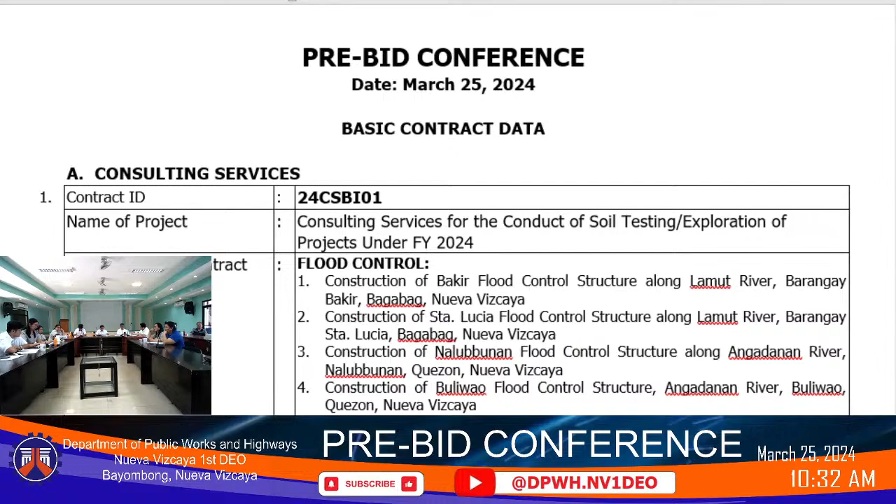Allow me to present to you the contract ID 24CSBI01, with the project name Consulting Services for the Conduct of Soil Testing Exploration of Projects under FY 2024, with an approved budget for the contract of 2,640,000 pesos. Duration is 105 calendar days. Cost of bid documents is 5,000 pesos. Source of fund: FY 2024.

So here are the locations of the contract, for the flood control projects. First one is the construction of Bakir flood control structure along Lamut River, Barangay Bakir, Bagabag, Nueva Vizcaya, with a number of 1 borehole at 15 meters depth. Next is construction of Santa Lucia flood control structure along Barangay Santa Lucia, Bagabag, Nueva Vizcaya, with a number of 1 borehole at 15 meters depth.

Next is the construction of Nalubbunan flood control structure along Angadanan River, Nalubbunan, Quezon, Nueva Vizcaya, with a number of one borehole. Next one is the construction of Buliwao flood control structure, Angadanan River, Buliwao, Quezon, Nueva Vizcaya, with the number of one borehole at 15 meters depth.

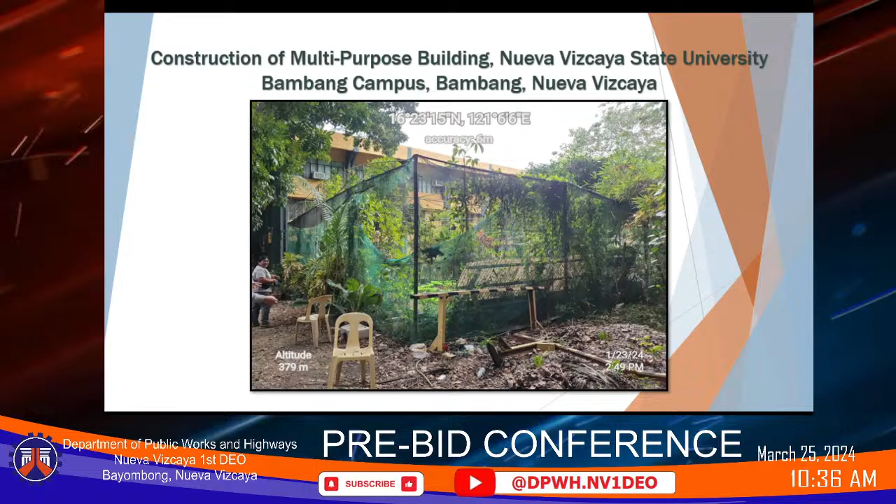Next is the construction of multi-purpose building and other improvements within the Capitol compound beside the Nueva Vizcaya Convention Center in Bayombong, Nueva Vizcaya with a number of 3 boreholes at 15 meters depth. Next is the construction of multi-purpose facility Nueva Vizcaya State University Sports Complex at Bayombong, Nueva Vizcaya with a number of 3 boreholes at 15 meters depth.

Next is the construction of DPWH Nueva Vizcaya First DEO Office Building Bayombong, Nueva Vizcaya with a number of 3 boreholes at 15 meters depth.

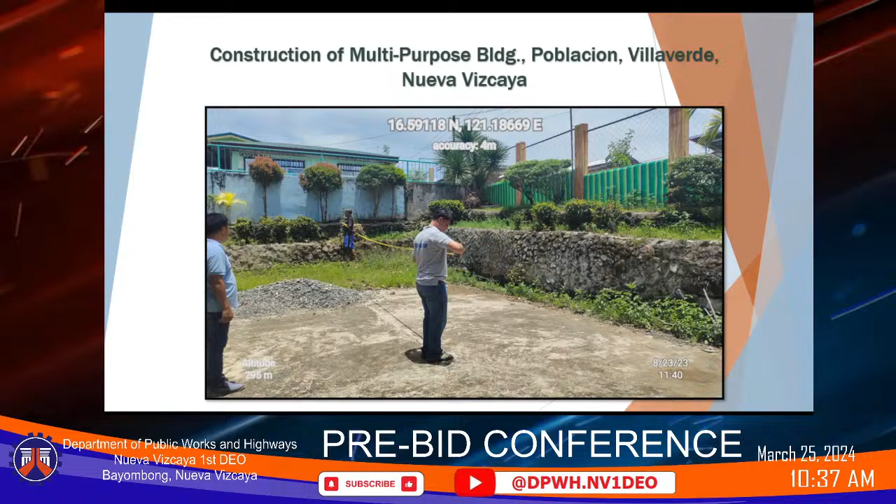Construction of multi-purpose building Balete, Diadi, Nueva Vizcaya with 2 boreholes at 15 meters depth. Construction of multi-purpose building Poblacion, Villaverde, Nueva Vizcaya with 2 boreholes at 15 meters depth. Construction of multi-purpose building Duli, Ambaguio, Nueva Vizcaya with 2 boreholes at 15 meters depth. And the construction of multi-purpose building Solano, Nueva Vizcaya with a number of 3 boreholes at 15 meters depth.

So for the bridge project, we have Collocal Bridge B01245LZ along the Maharlika Bypass Road with a number of 2 boreholes at 20 meters depth.

Next slide, please. So the scope of consulting services, the consultant shall conduct the following: geological survey and investigation, geotechnical investigation, at proposed project sites.

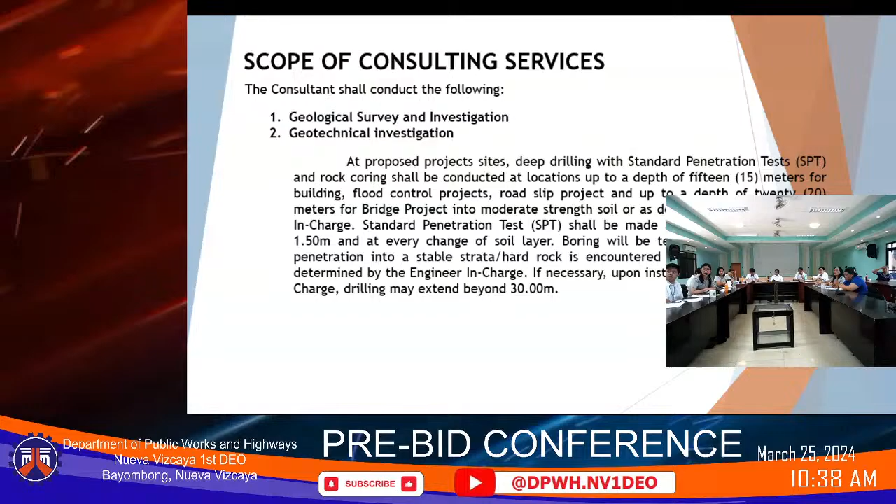Deep drilling with standard penetration tests, SPT, and rock coring shall be conducted at locations up to a depth of 15 meters for building, flood control projects, road slip projects, and up to a depth of 20 meters for bridge project into moderate strength soil or as determined by the engineer in charge.

Standard penetration tests shall be made at a minimum interval of 1.5 meters and at every change of soil layer. Boring will be terminated when 3 meters of penetration into a stable strata or hard rock is encountered at shallower depth or as determined by the engineer in charge.

If necessary, upon instruction of the engineer in charge, drilling may extend beyond 30 meters.

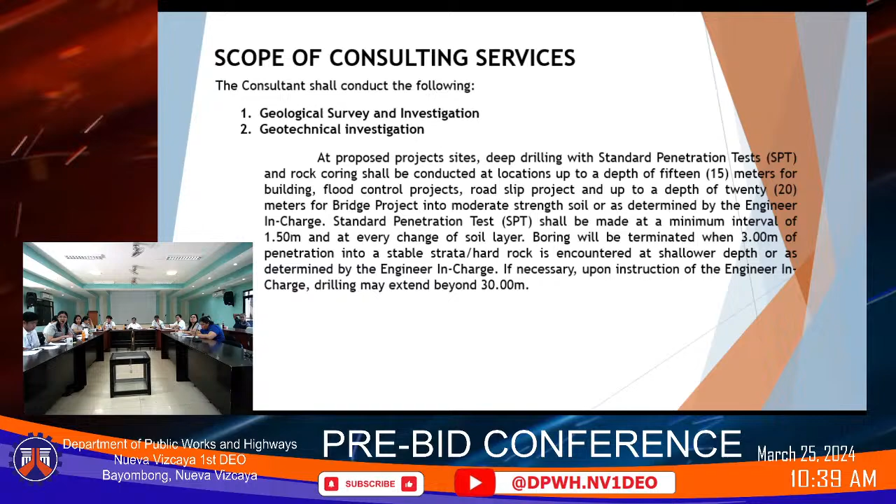Next slide, please. So, for the outputs, first one is the inception report, monthly progress report, partial report on investigation results, and final reports.

Next slide, please. So here are the final report shall include but not limited to the following. First is the field geological and geotechnical investigation and methodology, borehole drilling and coring, laboratory testing, vicinity maps, final boring logs, final laboratory test results, borehole location plan in a scale of 1:250, soil profile along structures showing boring, drilling, coring methods.

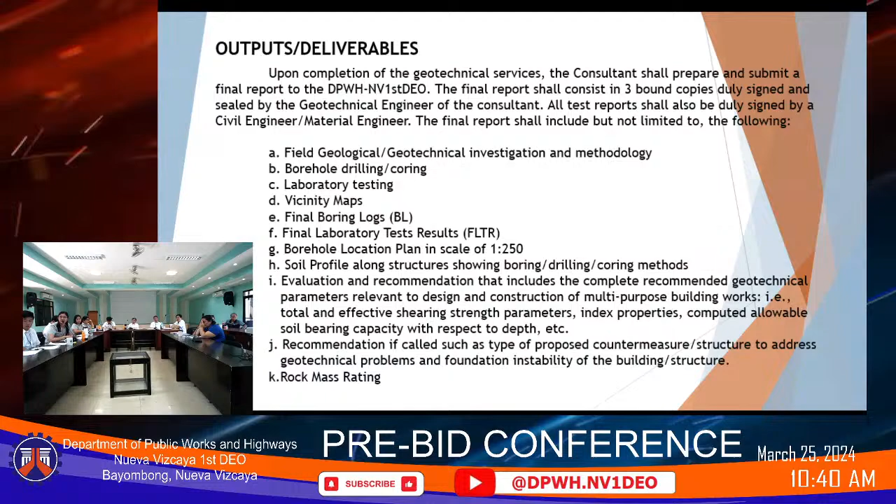Evaluation and recommendation that includes the complete recommended geotechnical parameters relevant to the design and construction of multipurpose building. The recommendation, if called such, as type of proposed countermeasure or structures to address geotechnical problems and foundation instability of the building and structure. Next is the rock mass rating.

Next slide, please. So other data to be submitted is the boring logs.

Next slide, please. Photographs. And that would be all. Thank you.

Thank you, Engineer De La Cruz, for the brief explanation of the terms of reference for these consulting services. From the Secretariat, does anyone from our YouTube live viewers, especially our prospective bidders, have any question or clarification regarding the first contract with contract ID number 24 CSBI 01? None.

Let's go to our BAC members. Starting with the Planning and Design section, provisional member Engineer Jermaine Buenavista, do you have any amendment for these consulting services? No amendment, Mr. Chair. Our provisional member for consultancy, Engineer Risa Tuliao? No amendment, sir. Noted. Our provisional member for all types of procurement, Architect Ivy Salazar? I have no amendment, sir. Noted.

Our BAC vice chair, Engineer Danilo Bernabe? No amendments, Mr. Chair. Since the majority of the BAC members have no amendment for these consulting services, we'll adopt the basic contract data as advertised. Take note, Engineer Brian Nilabs.

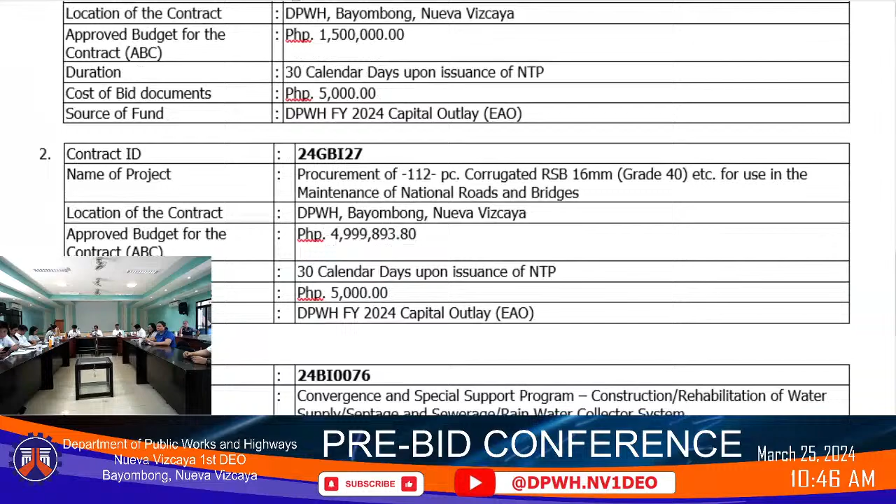For contract ID number 24 GBI 27, the name of the project is procurement of 112 pieces corrugated RSB 16mm grade 40, etc., for use in the maintenance of national roads and bridges. The location for the contract is at DPWH Bayombong, Nueva Vizcaya, and the approved budget for the contract is 4,999,893 pesos and 80 centavos.

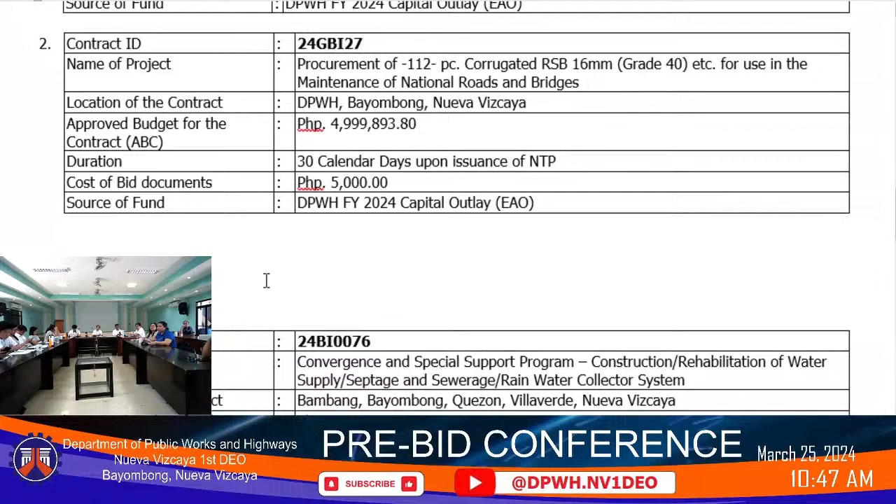The duration is 30 calendar days upon the issuance of NTP. The cost of bidding documents is 5,000 pesos and the source of fund is from the DPWH FY 2024 capital outlay. So for this goods contract, the contents are 310 bags of blown asphalt and 26 pieces of single-arm 8-meter pole solar LED roadway lighting.

The lighting is 120 watts, 1.5 meters mast arm length, with 250 km/h wind speed resistance on the mast arm. The other specifications for the solar panel: it should be 36 volts, 120 watts.

Monocrystalline silicon solar panel with a lithium ion grade A battery, 35 Ah/24V, battery model 32650, rated at 2,900 cycles. The LED chips are industrial grade high lumen chips. The charge controller should be microcomputer intelligent control for circuit protection.

The power output is 120 watts, luminous flux is 21,600 lumens, charging time is 6 to 7 hours, lighting time is 10 to 12 hours per day, and it can sustain up to 8 to 12 rainy days.

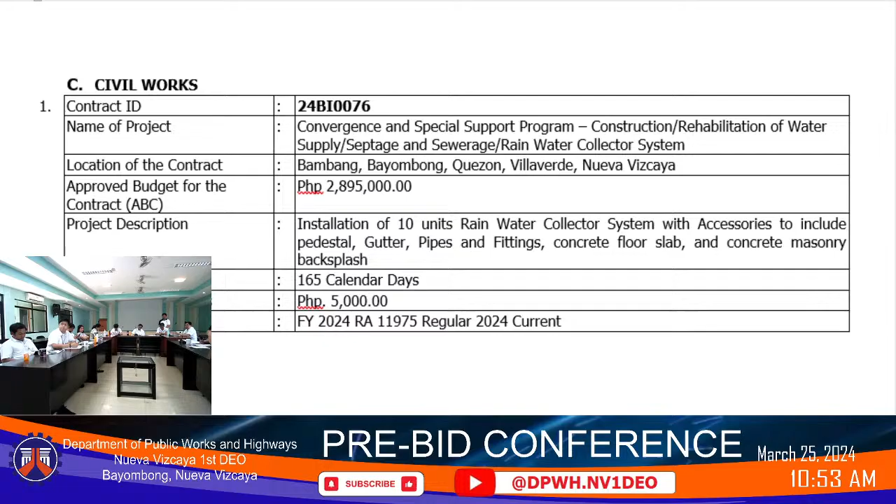The rainwater collector system 2024 shall be installed within 10 public schools. We have Nagbitin Elementary School, Villaverde, Governor Juan Manzano Elementary School, Villaverde, Almaguer South Elementary School, Bambang, Darubba Elementary School, Quezon, Masok Elementary School, Bayombong, Bintawan Norte Elementary School, Villaverde, Manamtam Elementary School, Bambang, Kasat Elementary School, Bayombong, Ocapon Elementary School, Villaverde, and Sawmill Elementary School, Villaverde.

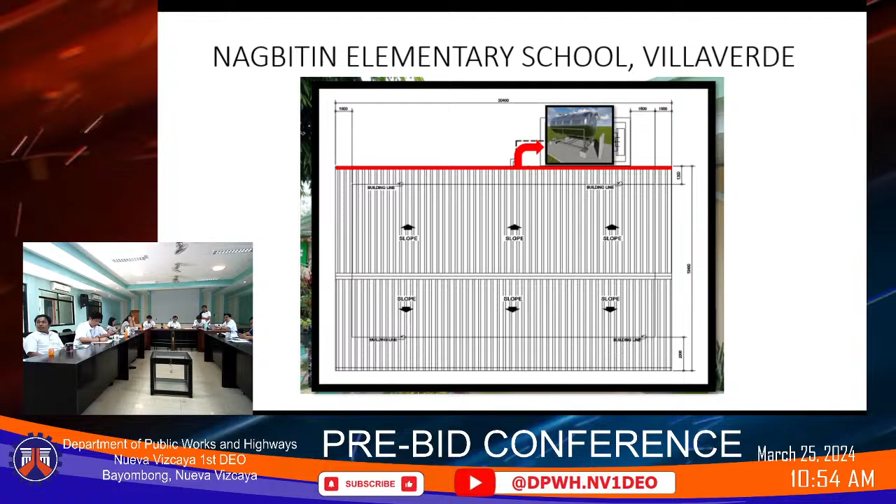The scope of work for this school is removal of existing downspout, installation of wire mesh and gutter, installation of pipelining, construction of one unit rainwater collector system. Source of aggregates is Maddiangat Quarry, and the source of material is Solano Market.

Next is the Governor Juan Manzano Elementary School with the geotag photo coordinates of 16.604765 degrees north and 121.156956 degrees east. This is the roof plan of our proposed rainwater collector. The location of the rainwater collector will be at the left side of the building.

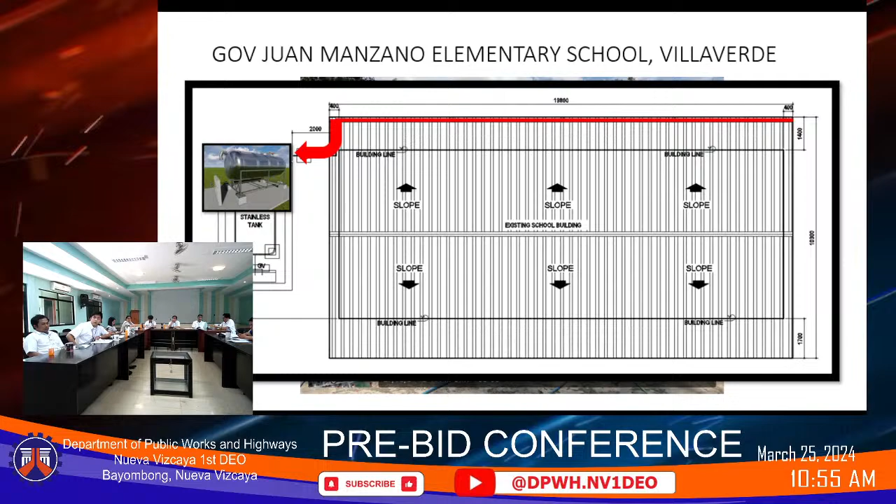The scope of work for this is the removal of the old fascia board, installation of steel fascia board, installation of flashing, installation of gutter with wire mesh, installation of pipelining, construction of one unit rainwater collector. Source of aggregates for this project is Maddiangat Quarry, and our source of material is Solano Market.

For Almaguer South Elementary School, this is the roof plan of our building. The location of our rainwater collector would be at the left side of the building, and the pipelining of the rainwater collector would be at the front and the rear of the building.

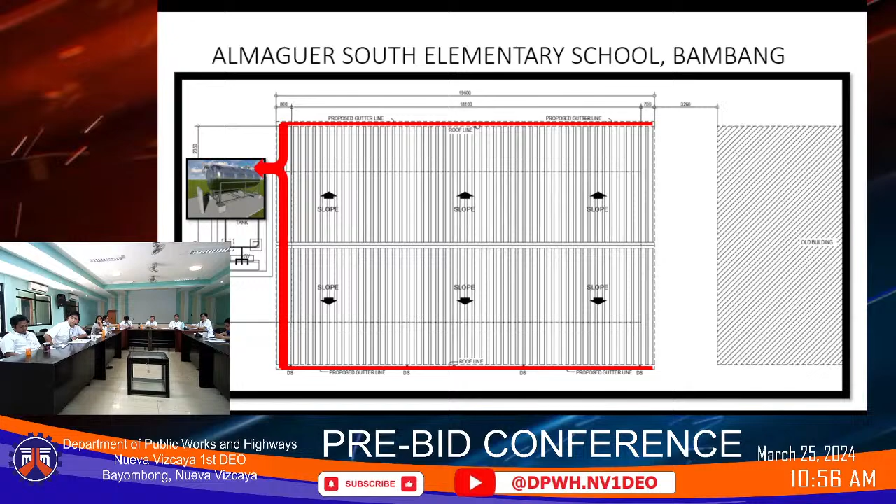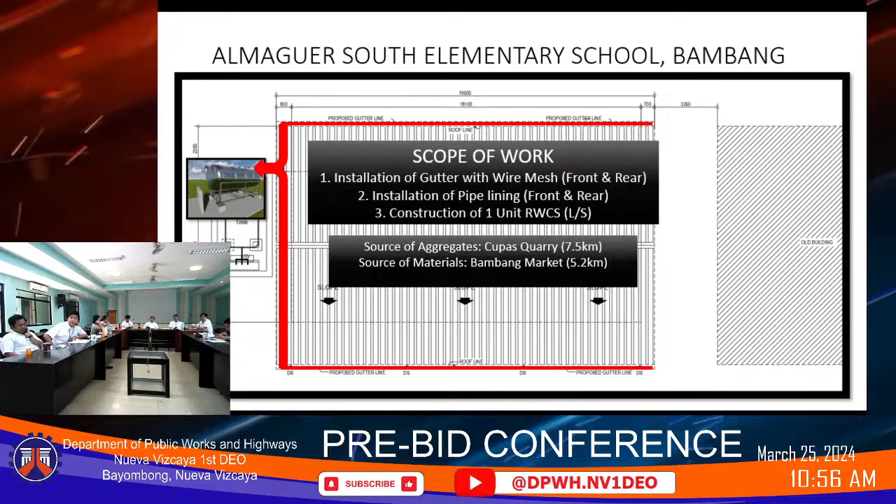The scope of work for this is the installation of gutter with wire mesh, installation of pipelining, and construction of one unit rainwater collector. The source of aggregate is at Cupas Quarry, and the source of material is at Bambang Market. Next is from Darubba Elementary School, Quezon.

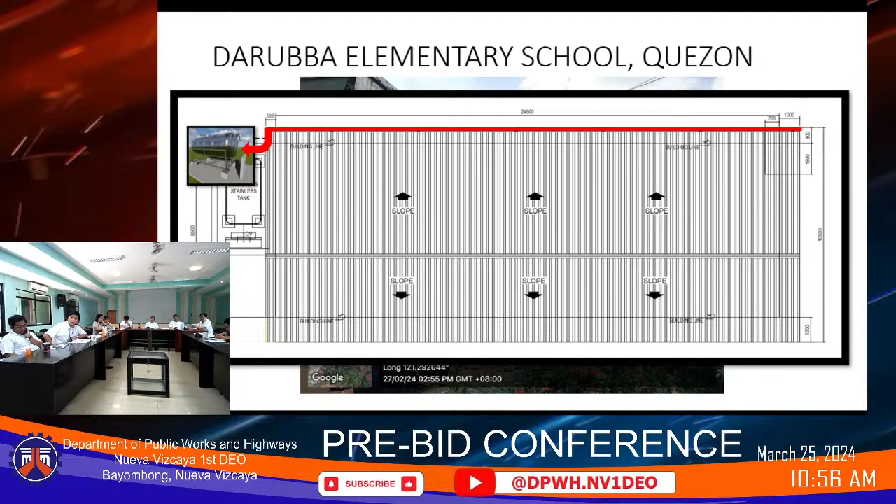This is the roof plan of our proposed rainwater collector. The location would be at the rear side of the building, and it directs to our proposed rainwater collector, which is located at the left side of the building. The scope of work for this school is installation of gutter with wire mesh, installation of pipelining, and construction of one unit rainwater collector. Our source of aggregate is Maddiangat Quarry, and source of material is Solano Market.

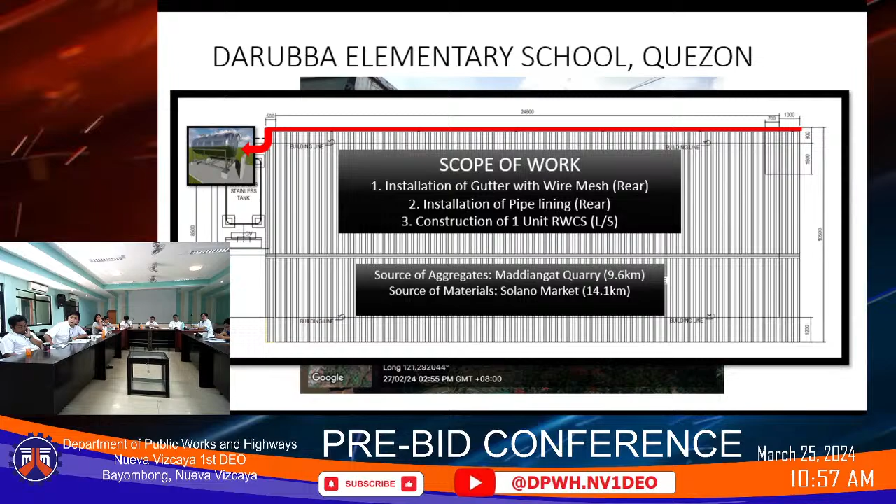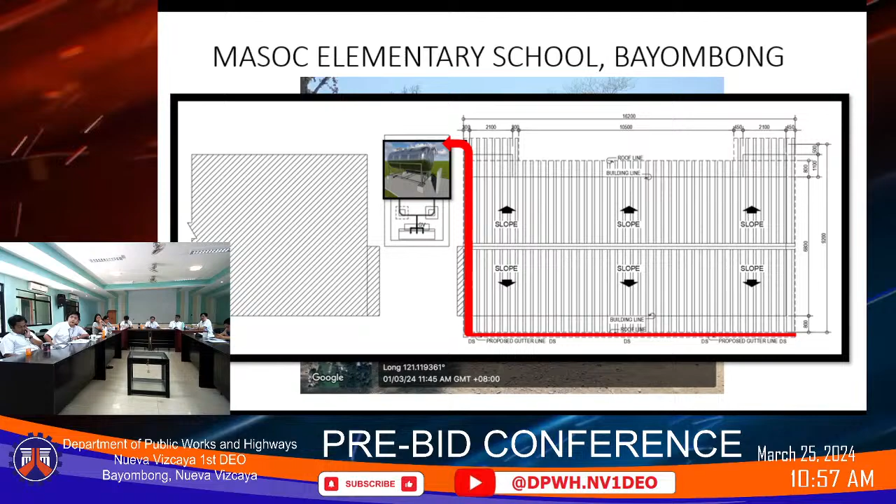For Masoc Elementary School, Bayombong, this is the roof plan of our rainwater collector system. Our rainwater collector would be at the front of the building, and our tank would be located at the left side. The scope of work for this building is removal of old fascia board, installation of steel fascia board, installation of gutter with wire mesh, installation of pipelining, and construction of one unit rainwater collector. The source of aggregate is Vista Alegre Quarry, and the source of material is Bayombong Market.

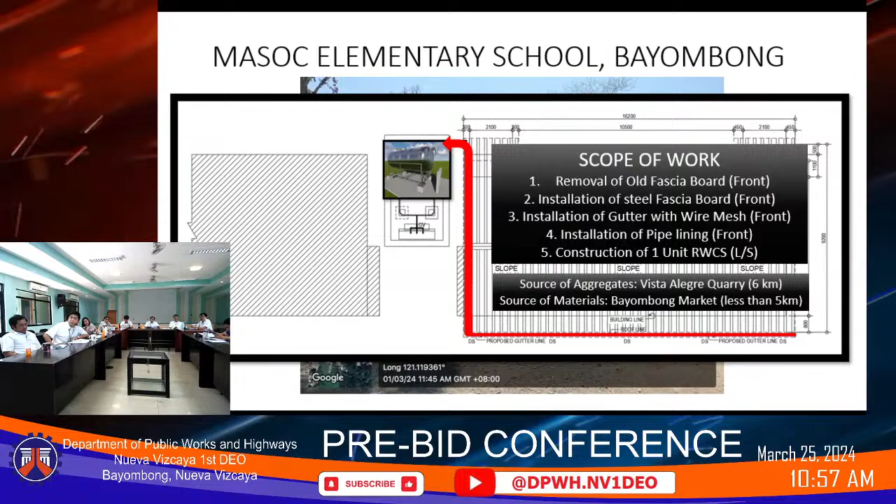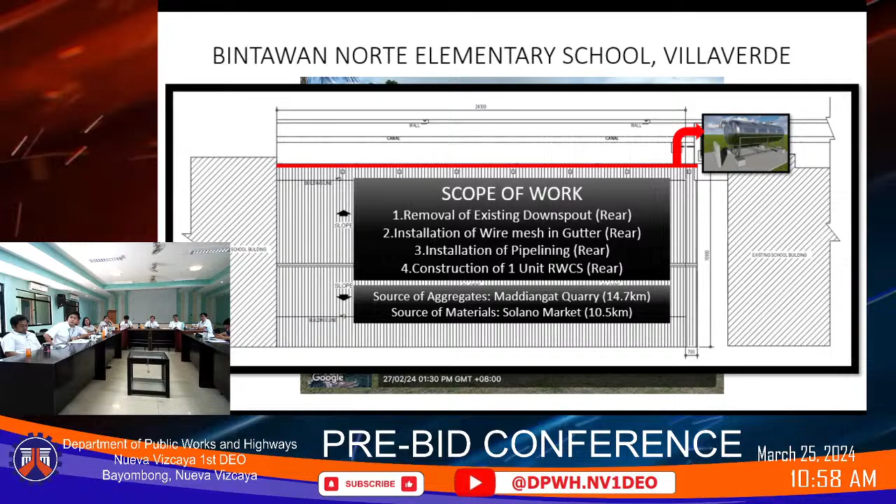Next is Bintawan Norte Elementary School. This is the roof plan of our proposed rainwater collector system. The red line would be our rainwater collector, located at the rear side of our building. The scope of work for this school is removal of existing downspout, installation of wire mesh in gutter, installation of pipelining, construction of one unit rainwater collector. Our source of aggregate is Maddiangat Quarry, and source of material is Solano Market.

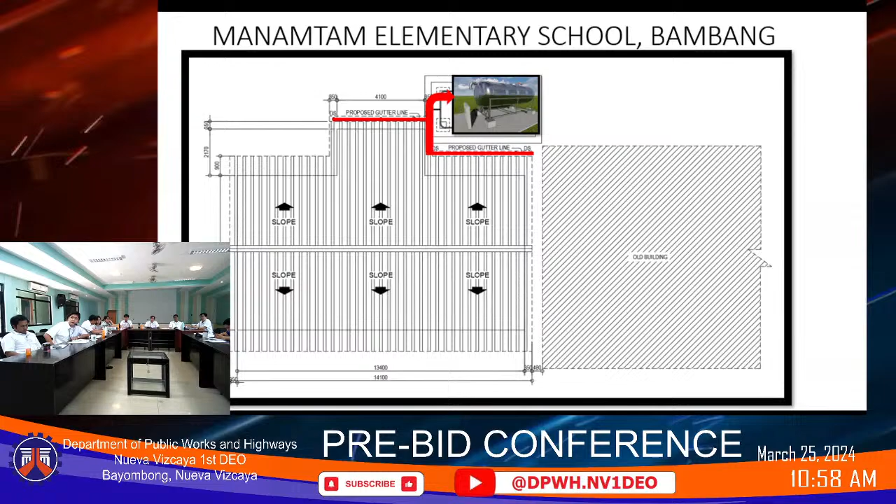Next is Manamtam Elementary School. This is the roof plan or roof plan of our building, and our rainwater collector will be located at the rear side. The scope of work for this building is installation of gutter with wire mesh, installation of pipelinings, construction of 1-unit rainwater collector. Our source of aggregate is Cupas Quarry, and our source of material is Bambang Market.

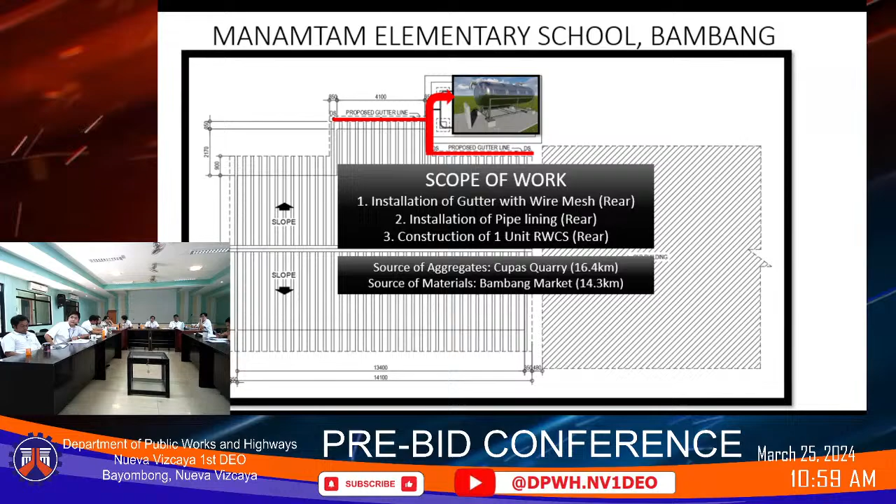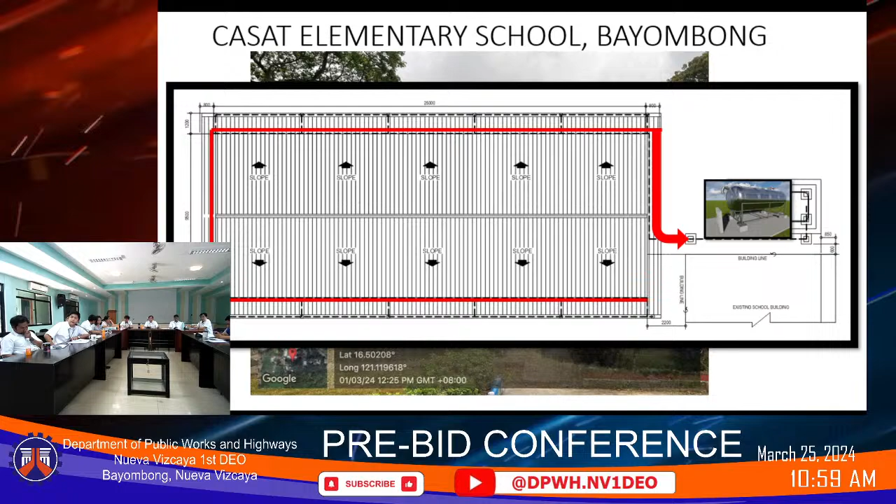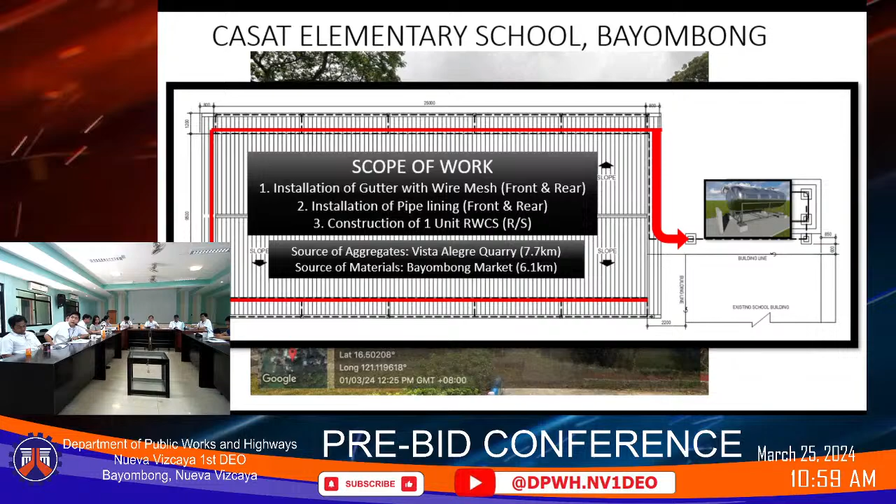Next is Casat Elementary School, Bayombong. This is the roof plan of our building, and our rainwater collector would be located at the front and rear of the roof, with our tank at the right side of our building. The scope of work is installation of gutter with wire mesh, installation of pipelining, and construction of 1-unit rainwater collector. Source of aggregate is Vista Alegre Quarry, and source of material is Bayombong Market.

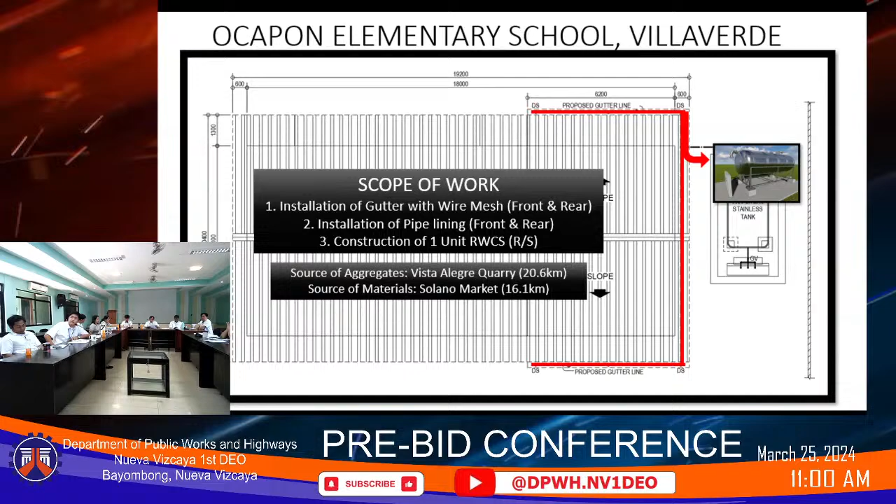Next is Ocapon Elementary School, Villaverde. This is the roof plan showing the location of our rainwater collector. The red line would be the catcher of our rainwater, located at the front and rear of the building, with our tank at the right side. The scope of work is installation of gutter with wire mesh, installation of pipelining, and construction of 1-unit rainwater collector. Our source of aggregate is Vista Alegre Quarry, and our source of material is Solano Market.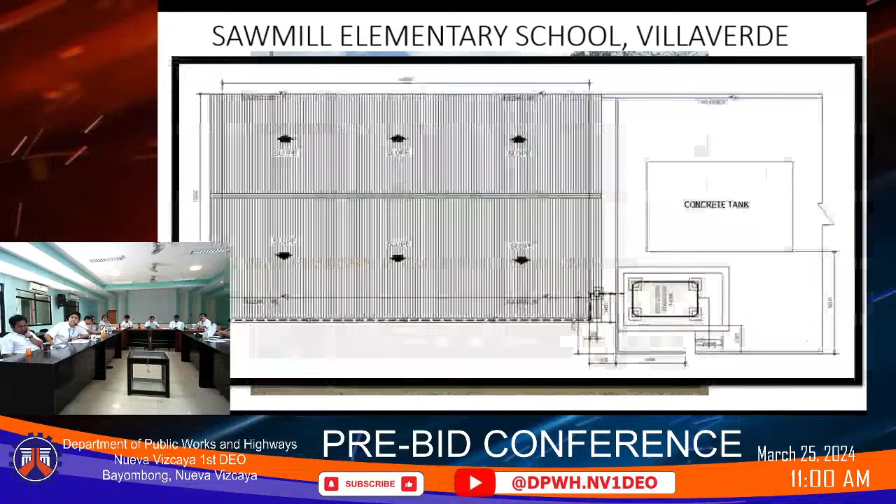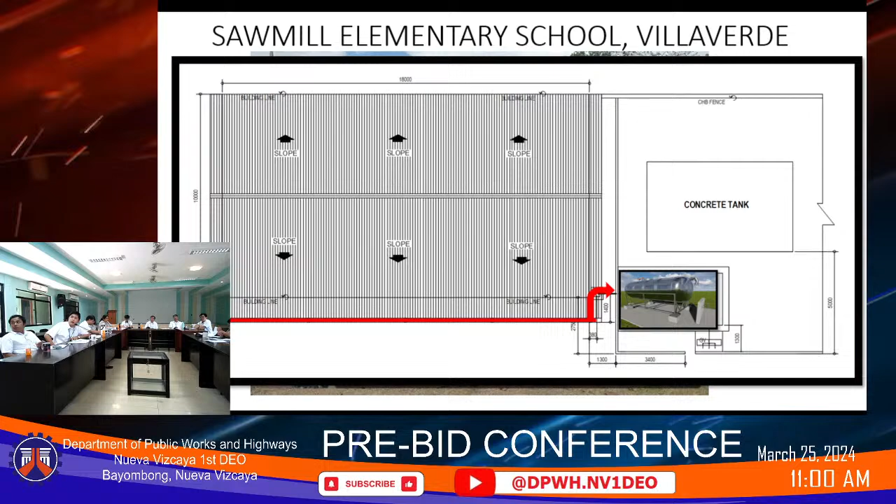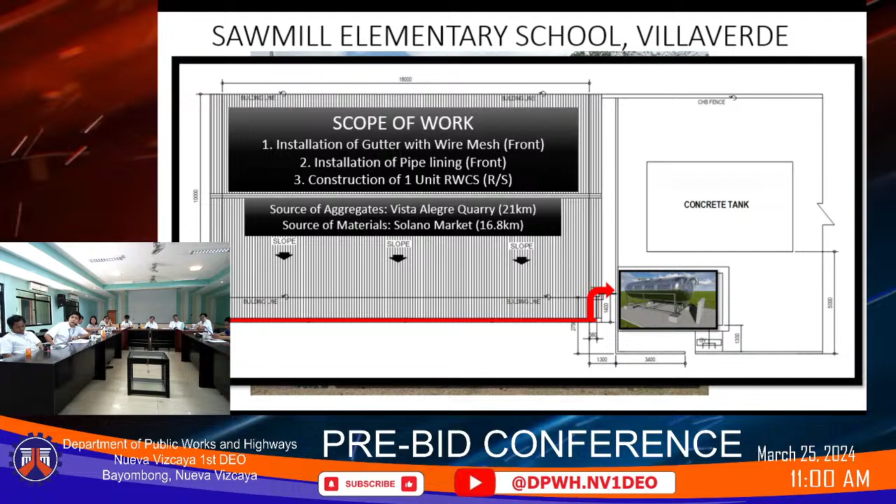For Sawmill Elementary School, Villaverde, this is the roof plan of our building. This is the rainwater collector, the red line, located at the front of our school, with the tank at the right side. Our scope of work is installation of gutter with wire mesh, installation of pipelining, and construction of 1-unit rainwater collector. Our source of aggregate is Vista Alegre Quarry, and our source of material is Solano Market.

That's all po. Thank you.

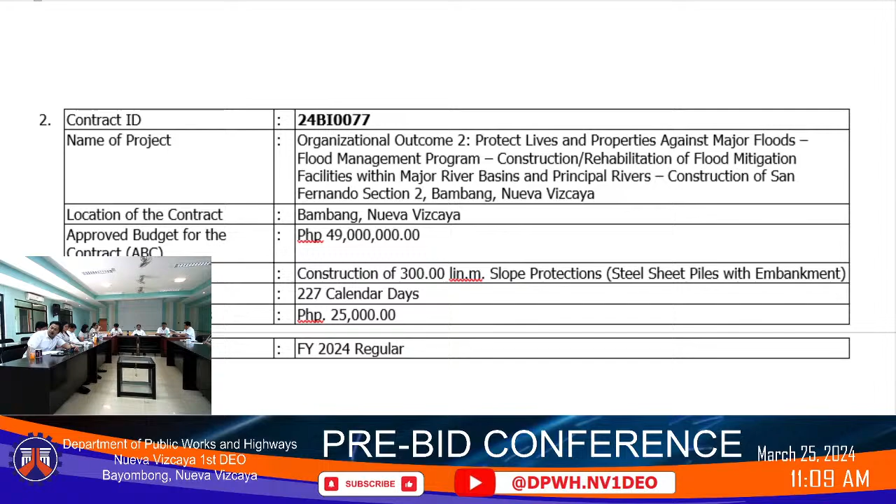Thank you, Mr. Chair. I am Marston Glenn Degamo from Planning and Design section. I'm here to discuss contract ID 24BI0077, name of project: organizational outcome 2, protect lives and properties against major floods, flood management program, construction slash rehabilitation of flood mitigation facilities within major river basins and principal rivers, construction of San Fernando 2, Bambang, Nueva Vizcaya. The location of the project is Bambang, Nueva Vizcaya. Approved budget for the contract is 49 million pesos only. Description of the project is construction of 300 linear meter slope protection, steel sheet pile with embankment. Duration of the project is 227 calendar days. Cost of bid is 25,000 pesos only, and the source of fund is fiscal year 2024 regular.

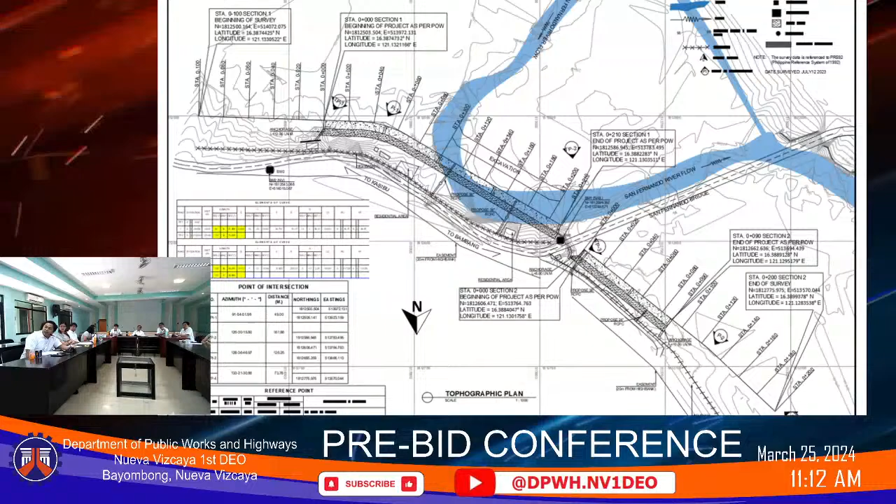Excuse me, Marston. Sir? Marston, please go back to the previous slide. Please show on the video screen the ongoing San Fernando flood control. Where is that located? Can you please... the very first one, let me...

That is for the information of our prospective bidders. I'm sorry to say, but I didn't show a line from the ongoing San Fernando flood control.

The location of the ongoing San Fernando flood control is near the sign going to Bambang, at the downstream of the bridge, at the alignment of abutment A, sir.

So the proposed project is located on the opposite side. Yes, sir, opposite side, which is abutment B, sir. Abutment 2. Yes, sir, abutment B, which is at the upper side, sir. Right.

Okay, that is for the information of our prospective bidders. Yes, sir. Next slide. I would like to continue.

The total height of the slope protection is 5 meters and total embankment of 5.5, with a walkway or top of the slope protection of 1.5 width. And the steel sheet pile that will be used is Z type, 9 meters length.

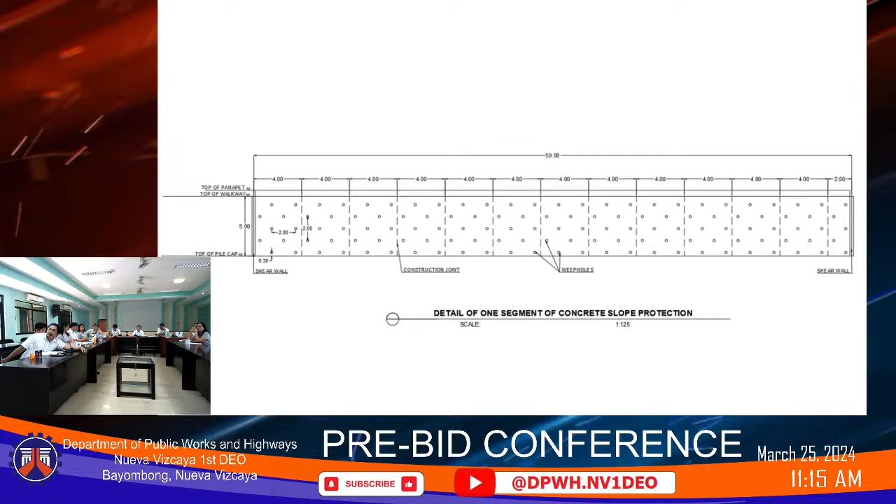The spacing of the weep holes is 2 meters, staggered, sir. Next slide, please. This is a close detail of the pile cap,

which has a main bar of 16 mm longitudinal bars and a stirrup of 12 mm spaced at 200 mm, and we also provide two extra bars labeled bar 2, 16 mm, and bar 3, 16 mm also, spaced 400 mm, or placed alternately.

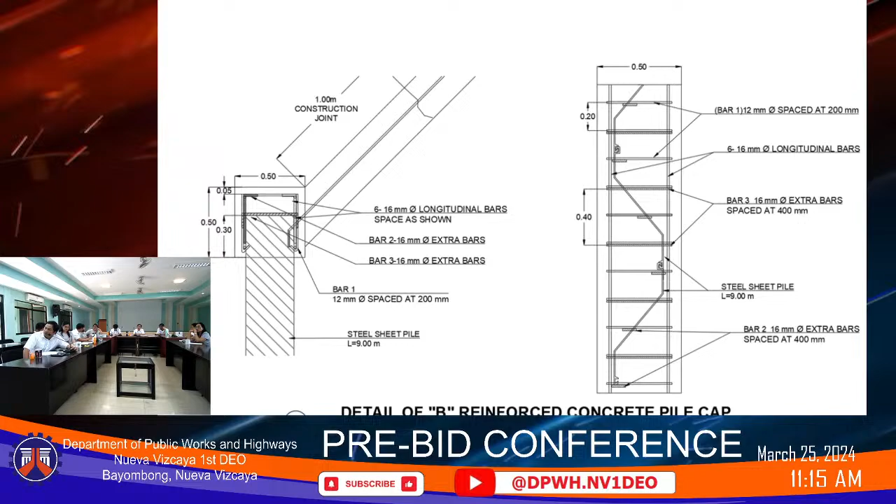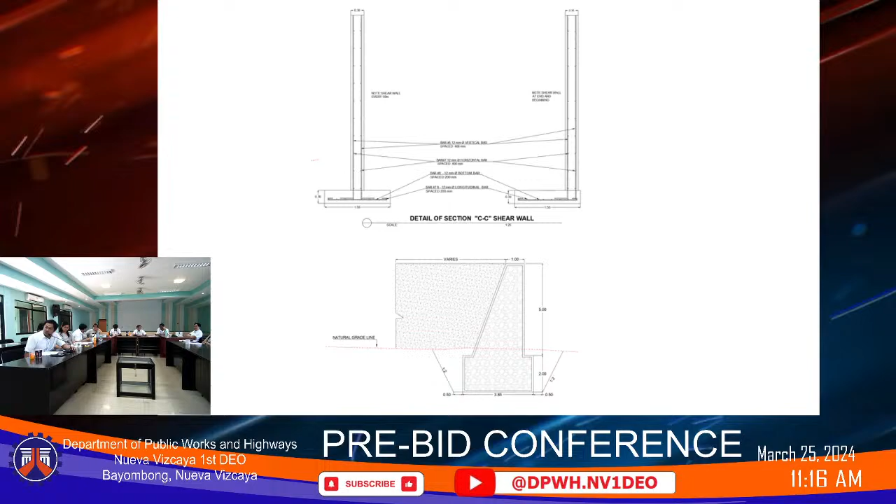Yes, sir. Every section will be provided with rubble concrete to contain its embankment, sir. Next slide, please. For the overview of our viewers and prospective bidders, this is an isometric view of the shear wall and the rubble concrete proposed in San Fernando Section 2.

The details can be seen and it will help visualize what the project will be. That's all, sir. Marston, what is the angle of the rubble concrete anchorage from the beginning to the end?

The proposed angle of the rubble concrete, which is located at the back of the retaining wall, would be 60 degrees, sir, for both upstream and downstream, as long as it will not contain the water, or it will be against the flow of the water, sir.

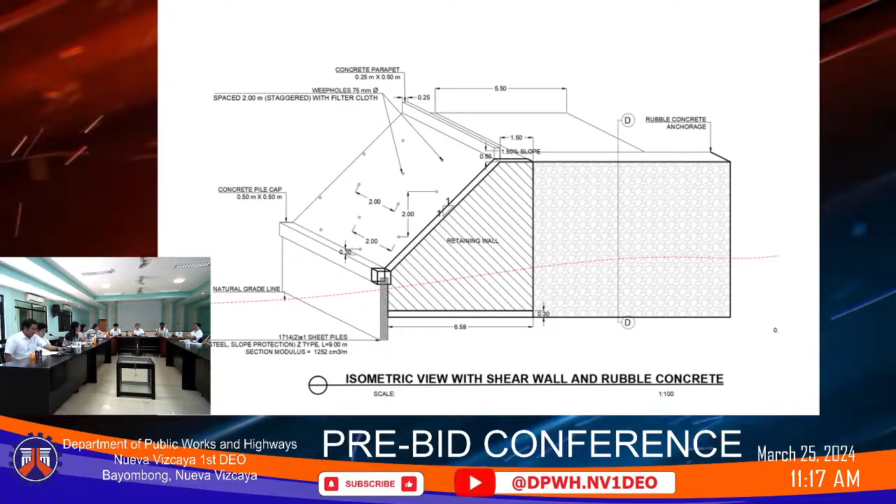That's all. Thank you, Engineer Marston Glenn Degamo, for the brief explanation of this particular project with contract ID number 24BI0077.

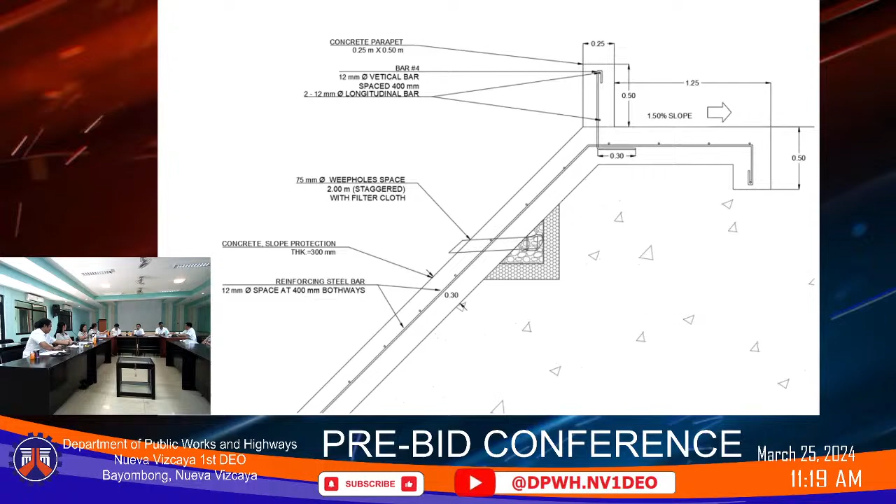Thank you. Do we have any other queries? Fellow BAC members? No further questions. Noted. Our regular BAC member, Engineer Reden A. Milyare - as per the basic contract data, no amendments, Mr. Chair. Noted. Our BAC Vice Chair, Engineer Danilo A. Bernabe - no amendments, Mr. Chair. Noted. Since majority of the BAC members have no amendment for this particular project, then we'll adopt the basic contract data as advertised. Take note, Engineer Ryan Augusto, our Head Secretariat.

Well noted, Mr. Chair. For the last civil works project for today is with contract ID number 24BI0078. I request our preparer, Engineer Maria Angelica de la Cruz, discuss in details the scope of work of this particular project. Engineer de la Cruz, take it away.

Good morning once again. Let me present to you contract ID 24BI0078 with the name of project Convergence and Special Support Program, Basic Infrastructure Program BIP, Multipurpose Buildings/Facilities to support social services, construction, completion of multipurpose building, Barangay Butao. Location of the project: Diadi, Nueva Vizcaya, with an approved budget for the contract of 3,465,000 pesos. Project description: construction of 15 meters by 25 meters covered court. The duration is 130 calendar days. Cost of bid documents, 5,000 pesos. And the source of fund is FY 2024.

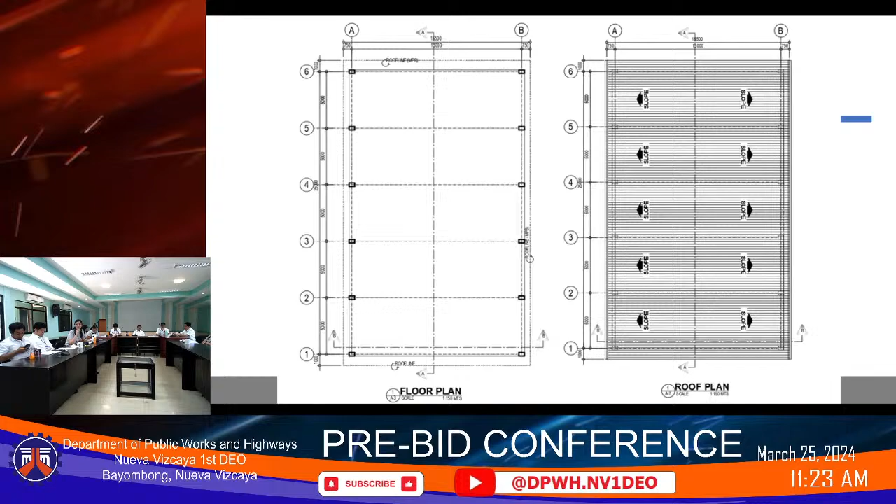Shown on the screen is the floor plan and roof plan of the proposed project. Next slide please - the front and rear elevation, the typical side elevation, and that would be all. Thank you.

Thank you, Engineer Maria Angelica de la Cruz, for the brief explanation for this particular project with contract ID number 24BI0078. Again, may I request from the Secretariat, does anyone from our prospective bidders have questions or clarifications for this third project? None?

Do you have any amendment? Architect IB Salazar, our provisional member for all types of procurement - I have no amendment, sir. Our BAC regular member, Engineer Reden A. Milyare - no amendment, sir. Noted. Our BAC Vice Chair, Engineer Danilo A. Bernabe.

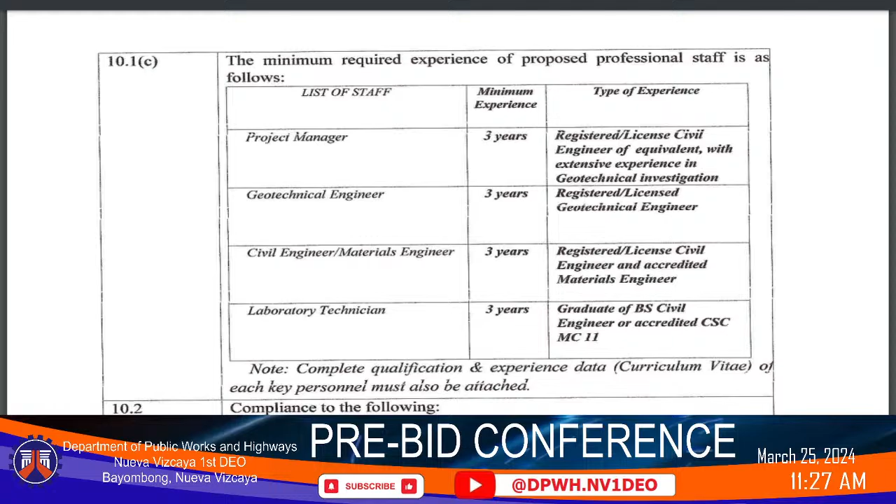For the type of experience: the project manager must be a registered licensed civil engineer or equivalent with extensive experience in geotechnical investigation. The geotechnical engineer must be a registered licensed geotechnical engineer. The civil engineer/materials engineer must be a registered licensed civil engineer and accredited materials engineer. The laboratory technician must be a graduate of BS Civil Engineering or accredited CSC MC11.

For ITB clause 10.2(vii), minimum equipment requirement for the project: drilling machine with complete accessories, required units is 1. Split spoon sampler, hammer double tube core barrel, and water pump, required units is 1.

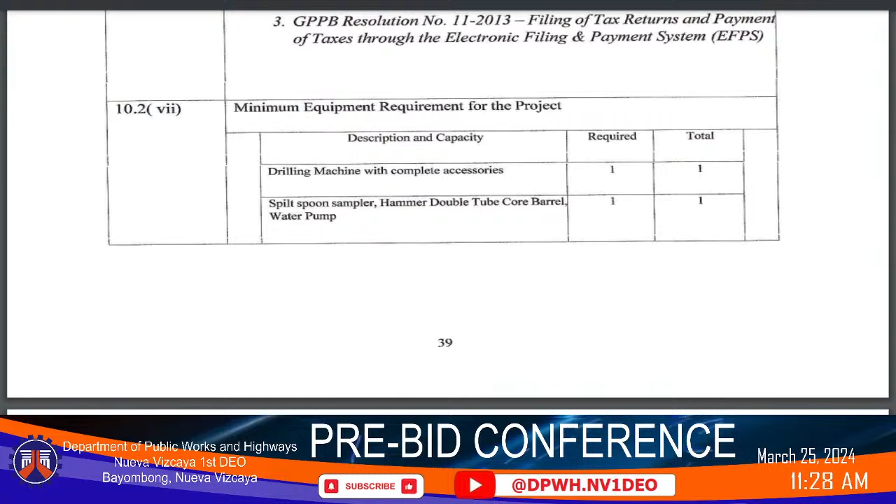For the bid security, ITB clause 15.1: the bid security shall be in the following amounts. 2% of ABC if cash, cashier's/manager's check, bank draft guarantee, or irrevocable letter of credit. 5% of ABC if bid security is surety bond. Bid securing declaration. Or any combination of the foregoing, proportionate to the share or form with respect to the total amount of security.

For goods and services, contract ID numbers 24GBI026 and 24GBI027 are for goods.

For ITB clause 14.1, the bid security shall be in the form of the bid securing declaration or any of the following forms and amounts: A, not less than 2% of ABC if bid security is in cash, cashier's/manager's check, bank draft guarantee, or irrevocable letter of credit. Or B, not less than 5% if the bid security is in surety bond.

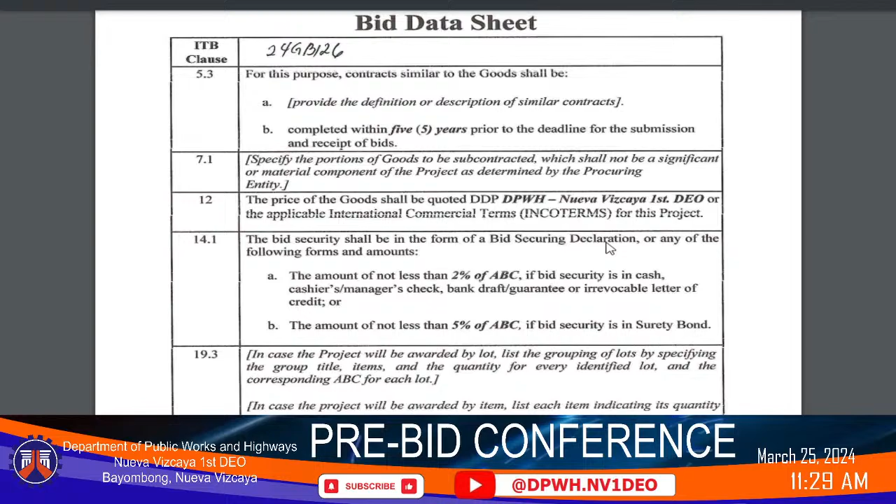For ITB clause 20.2, licenses and permits relevant to the project and corresponding law requiring it: 1, Mayor's Permit; 2, DTI; 3, PhilGEPS registration; 4, tax clearance; and 5, supplier's registration certificate or SRC.

For the terms and conditions: 1, supplier must own service centers and facilities in Luzon. 2, supplier must be ISO certified. 3, one-year warranty on equipment. And 4, equipment will be delivered free of charge.

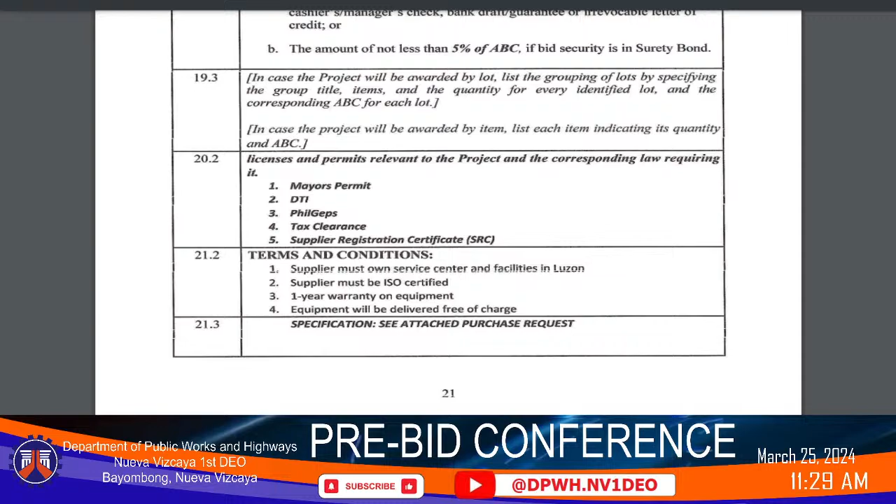For the bid requirement of the bid data sheet for these 3 civil works projects, contract ID number 24BI0076, ITB clause 14.2A4B, the minimum work experience requirements for the key personnel are the following.

For the key personnel, we have project manager, project engineer, materials engineer, foreman, and safety officer. Minimum years of similar experience in the same position is 3 years, and minimum years of total work experience in the same position is

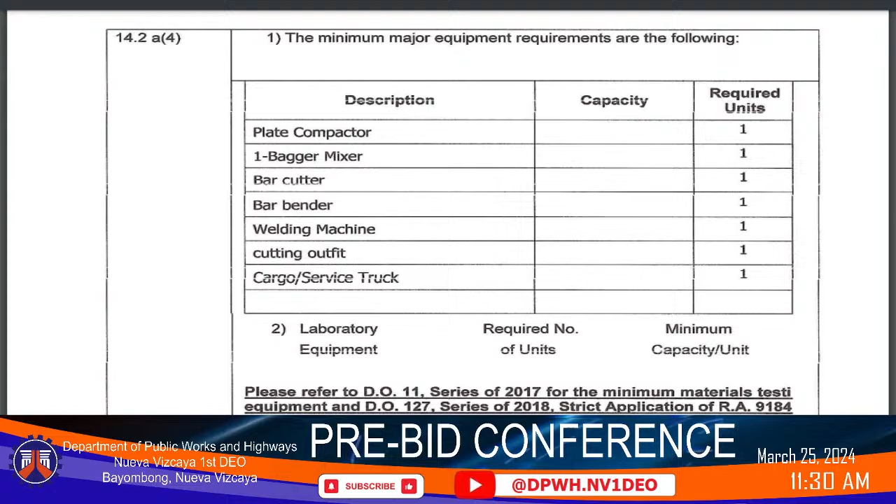3 years. For ITB clause 14.2A4, the minimum major equipment requirements are the following: plate compactor, one bagger mixer, required units is 1; bar cutter, bar bender, welding machine, cutting outfits, cargo and service truck, required units is 1.

For the laboratory equipment, please refer to Department Order number 11, series of 2017. For the minimum materials testing equipment and DO number 127, series of 2018, strict application of Republic Act 9184, the conduct of post-qualification of bidders with delayed ongoing contracts within the DPWH.

For contract ID number 24BI0077, for the construction of San Fernando 2, Bambang, Nueva Vizcaya.

For the key personnel, we have the project manager, project engineer, materials engineer, foreman, and safety officer. Minimum years of similar experience in the same position is 5 years. Minimum years of total work experience in the same position is 5 years.

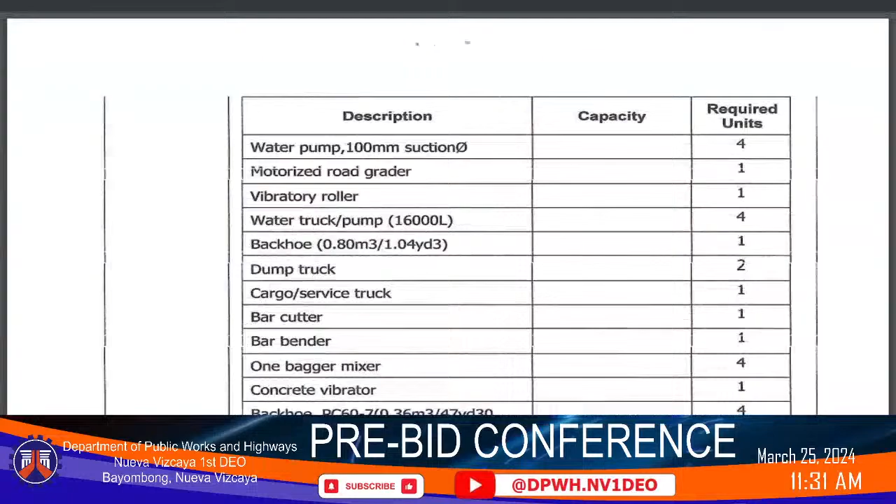For ITB clause 14.2A4, the minimum major equipment requirements are the following: water pump, 1,000 liters, 100 millimeter suction diameter capacity, required units is 4. Motorized road grader and vibratory roller, required units is 1.

Water truck pump, 16,000 liters, required units is 4. Backhoe, 0.8 cubic meter to 1.04 cubic yards capacity, required units is 1. Dump truck, required units is 2.

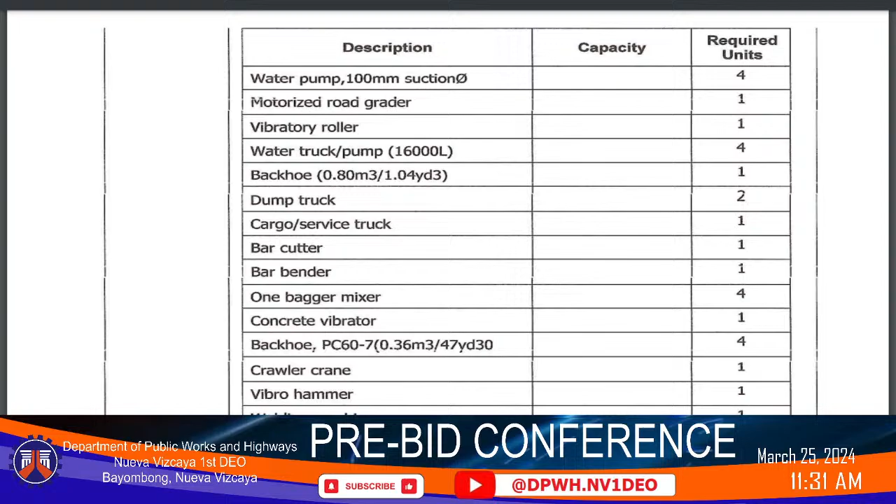Cargo service truck, bar cutter, and bar bender, required units 1. One bagger mixer, required units 4. Concrete vibrator, required units is 1.

Backhoe, PC60-7, 0.36 cubic meter to 0.47 cubic yards, required units is 4. Crawler crane, vibro hammer, welding machine, and payloader and low bed trailer, required units is 1.

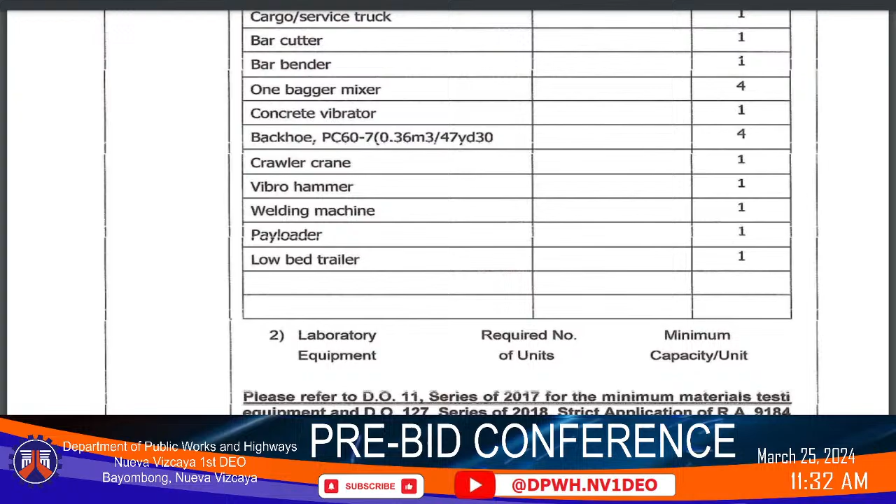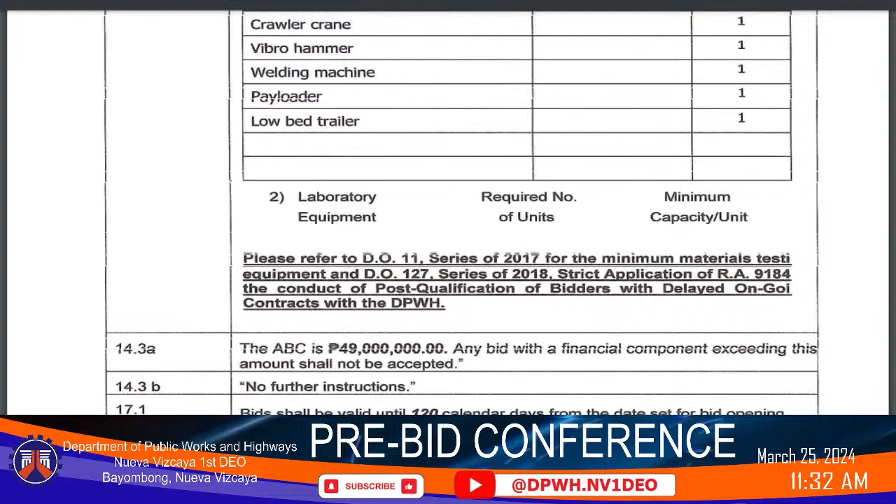For the laboratory equipment, please refer to DO number 11, series of 2017. For the minimum materials testing equipment and DO 127, series of 2018, strict application of Republic Act 9184, the conduct of post-qualification of bidders with delayed ongoing contracts within the DPWH.

For the last project, with contract ID number 24BI0078, for the civil works project. ITB clause 14.2A4B, the minimum work experience requirements for the key personnel are the following.

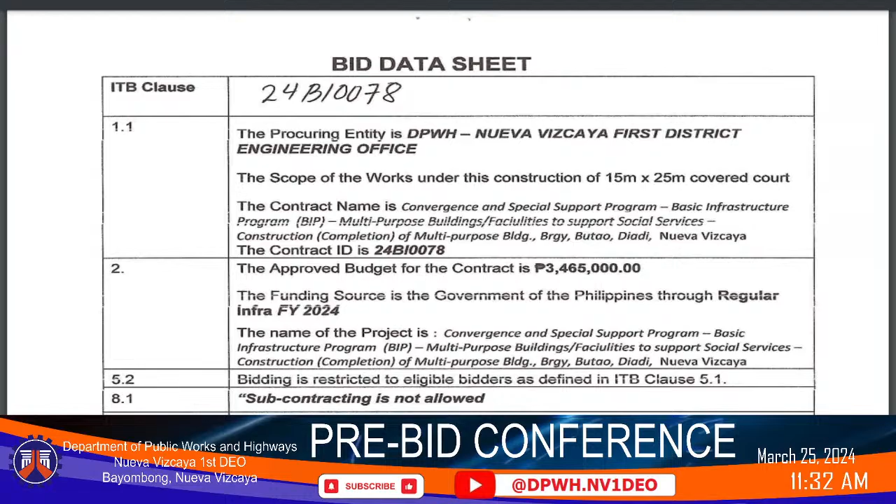We have the project manager, project engineer, materials engineer, foreman, and safety officer. Minimum years of similar experience in the same position is 3 years. Minimum years of total work experience in the same position is 3 years. For ITB clause 14.2A4, the minimum major equipment requirements are the following.

For the description, we have plate compactor, required units 1; bagger mixer; bar cutter; bar bender; welding machine, diesel; and gas driven cutting outfit, required unit is 1.

For the laboratory equipment, please refer to DO number 11, series of 2017, for the minimum materials testing equipment, and Department Order number 127, series of 2018, strict application of Republic Act 9184, on the conduct of post-qualification of bidders with delayed ongoing contracts within the DPWH. That's also for the requirements of the bidding documents for these particular projects.

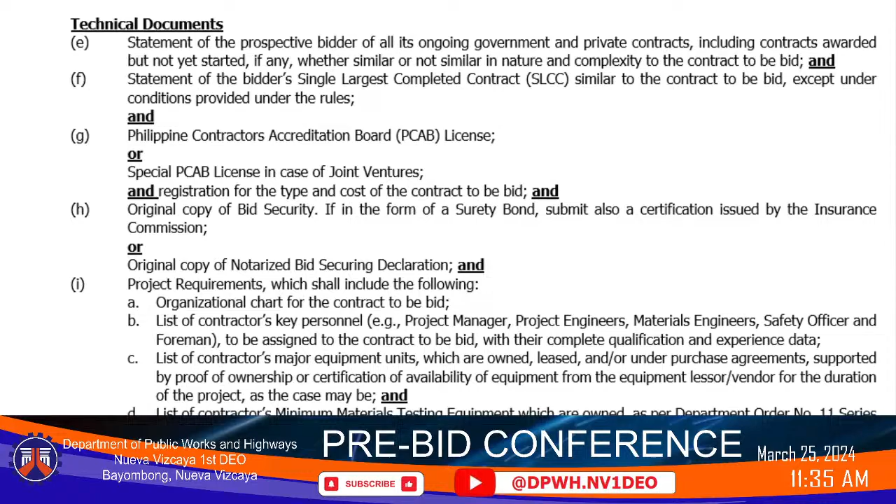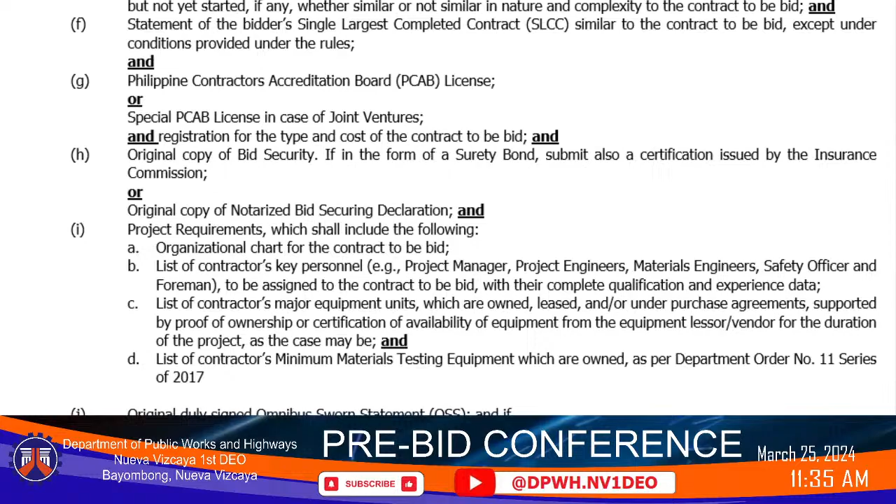And letter F, statement of the bidder's single largest completed contract, or SLCC, similar to the contract to be bid, except under conditions provided under the rules. And letter G, Philippine Contractors Accreditation Board or PCAB license, or special PCAB license in case of joint ventures, and registration for the type and cost of the contract to be bid.

And letter H, original copy of bid security in the form of surety bond. Submit also the certification issued by Insurance Commission, or original copy of notarized bid securing declaration. And letter I, project requirements, which shall include the following.

First, organizational chart for the contract to be bid. Second, list of contractors' key personnel, for example, project manager, project engineers, materials engineers, safety officer, and foreman, to be assigned to the contract to be bid, with their complete qualification and experience data.

Third, list of contractors' major equipment units which are owned, leased, and or under purchase agreements, supported by proof of ownership or certification of availability of equipment from the equipment lessor, vendor, for the duration of the project as the case may be. And last, list of contractors' minimum material testing equipment which are owned as per Department Order Number 11, Series of 2017.

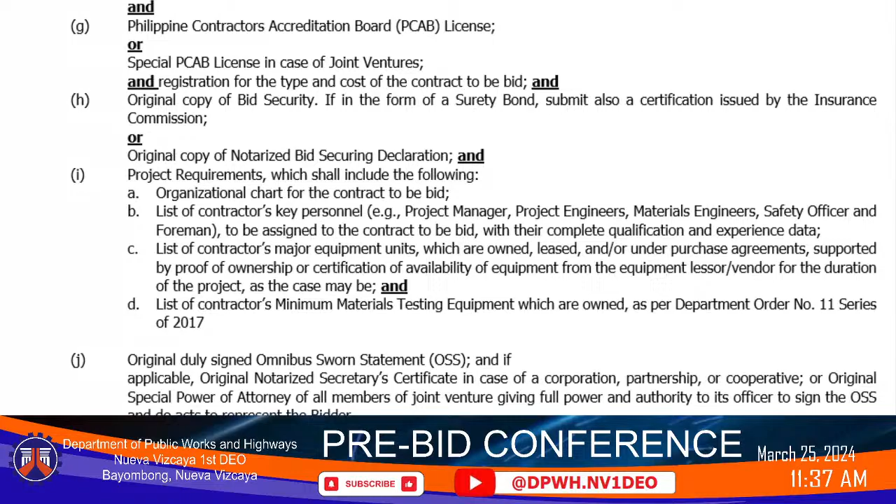For letter J, original duly signed omnibus sworn statement or OSS, and if applicable, original notarized secretary's certificate in case of corporation, partnership, or cooperatives, or original special power of attorney of all members of joint venture, giving full power and authority to its officer to sign the OSS and to do acts to represent the bidder.

For financial documents, letter K, the prospective bidder's audited financial statement showing, among others, the prospective bidder's total and current assets and liabilities, stamp received by the BIR or its duly accredited and authorized institutions for the preceding calendar year, which should not be earlier than 2 years from the date of bid submission.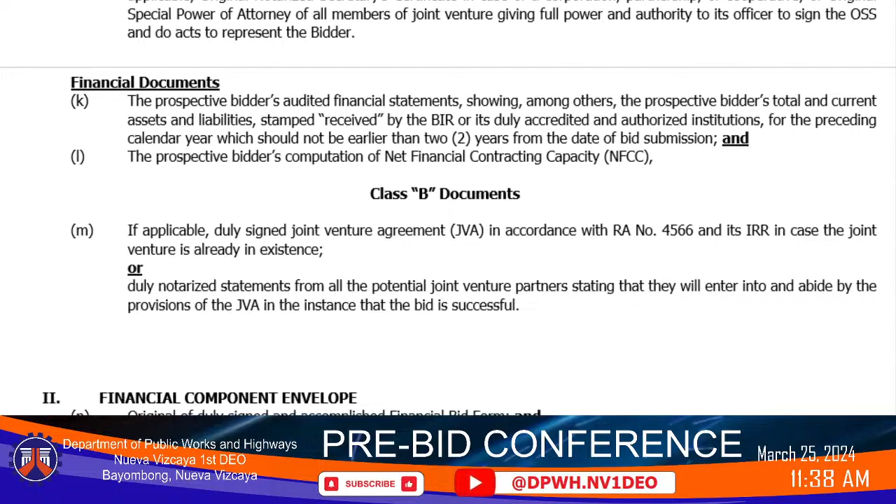And letter L, the prospective bidder's computation of net financial contracting capacity, or NFCC, Class B documents. Letter M, if applicable, duly signed joint venture agreement or JVA in accordance with the Republic Act number 4566 and its IRR in case the joint venture is already in existence, or duly notarized statement from all the potential joint venture partners stating that they will enter into and abide by the provisions of the JVA in the instance that the bid is successful.

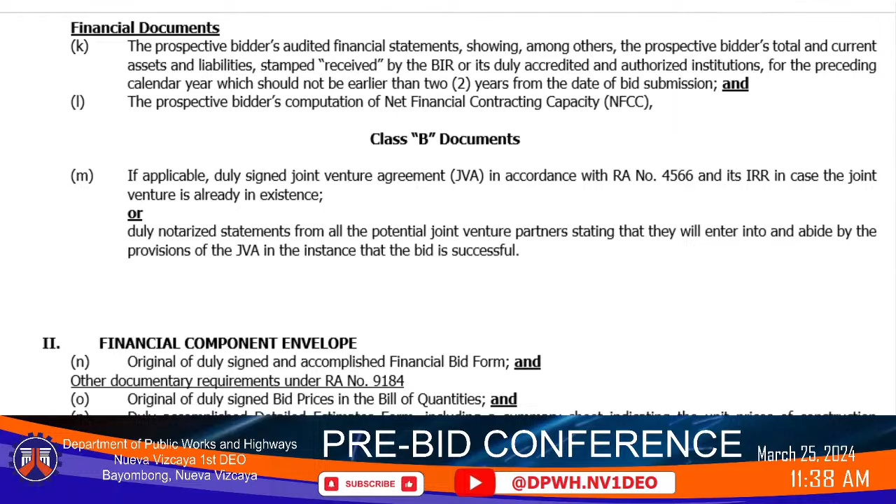Number 2, financial component envelope. Letter N, original of duly signed and accomplished financial bid form and other documentary requirements under Republic Act number 9184. Letter O, original of duly signed bid prices in the bill of quantities.

And letter P, duly accomplished detailed estimate form including a summary sheet indicating the unit prices of construction materials, labor rates, and equipment rental used in coming up with the bid. And letter Q, cash flow by quarter.

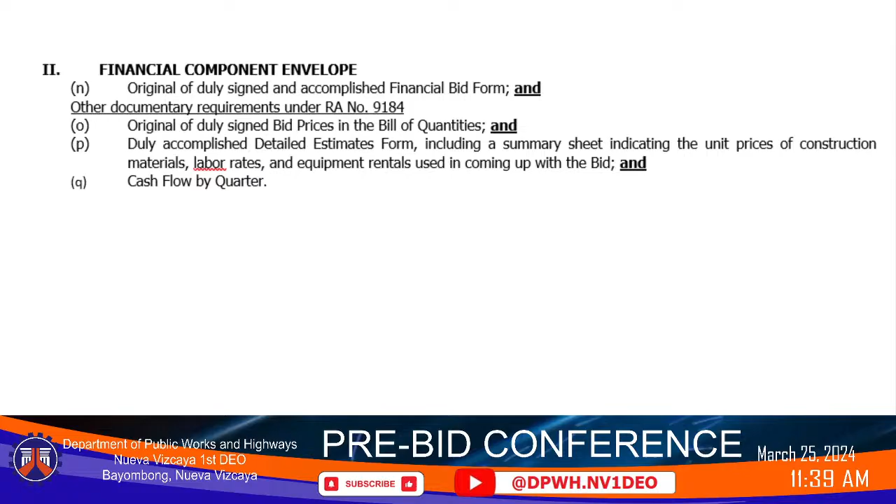That's also for agenda number 3, documents to be submitted by the bidder, including technical and financial proposals.

Completeness of the bid. Unless the instructions to bidders specifically allow partial bids, bids not addressing or providing all of the required items in the bidding documents, including, as applicable, bill of quantities, shall be considered non-responsive and thus automatically disqualified. In this regard, where a required item is provided but no price is indicated, the same shall be considered as non-responsive. But specifying a zero or a dash for the said item would mean that it is being offered for free to the government, except those required by law or regulations to be provided for.

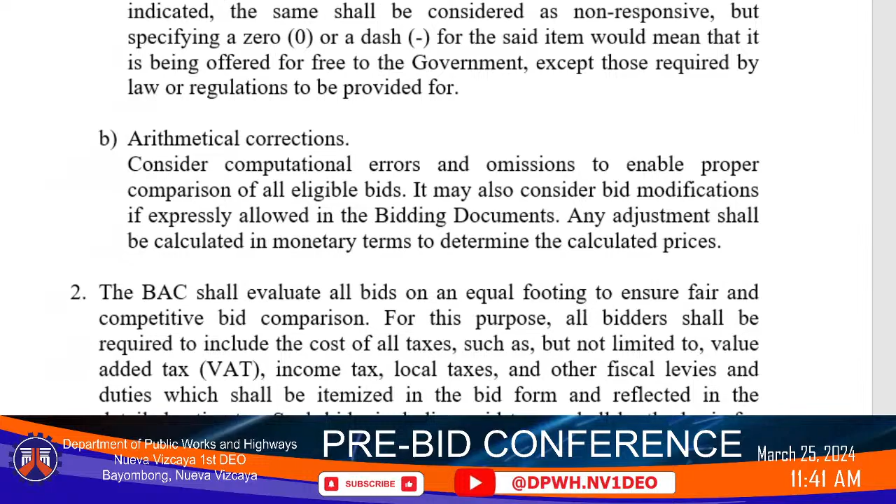Arithmetical corrections: consider computational errors and omissions to enable proper comparison of all eligible bids. It may also consider bid modifications if expressly allowed in the bidding documents. Any adjustment shall be calculated in monetary terms to determine the calculated prices.

The BAC shall evaluate all bids on an equal footing to ensure fair and competitive bid comparison. For this purpose, all bidders shall be required to include the cost of all taxes, such as, but not limited to, value-added tax, income tax, local taxes, and other fiscal levies and duties, which shall be itemized in the bid form and reflected in the detailed estimates. Such bids, including said taxes, shall be the basis for bid evaluation and comparison.

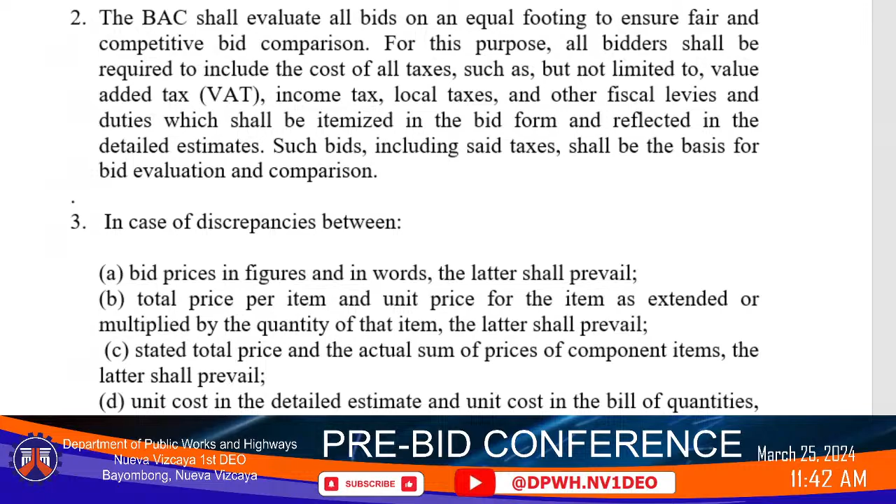In case of discrepancies between bid prices in figures and in words, the latter shall prevail. Between total price per item and unit price for the item as extended or multiplied by the quantity of that item, the latter shall prevail. Between stated total price and the actual sum of prices of component items, the latter shall prevail. Between unit cost in the detailed estimate and unit cost in the bill of quantities, the latter shall prevail.

Post-qualification: objective and process of post-qualification. The lowest calculated bid shall undergo post-qualification in order to determine whether the bidder concerned complies with and is responsive to all the requirements and conditions as specified in the bidding documents.

Within 5 calendar days from receipt by the bidder of the notice from the BAC that the bidder has the lowest calculated bid, the bidder shall submit to the BAC its latest income and business tax returns and other appropriate licenses and permits required by law and stated in the bidding documents.

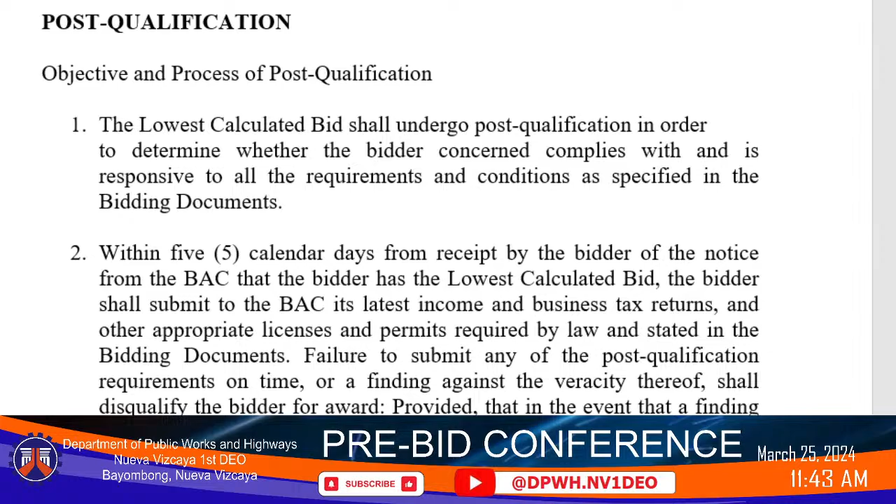Failure to submit any of the post-qualification requirements on time, or a finding against the veracity thereof, shall disqualify the bidder for award, provided that in the event that a finding against the veracity of any of the documents submitted is made, it shall cause the forfeiture of the bid security in accordance with Section 69 of this IRR.

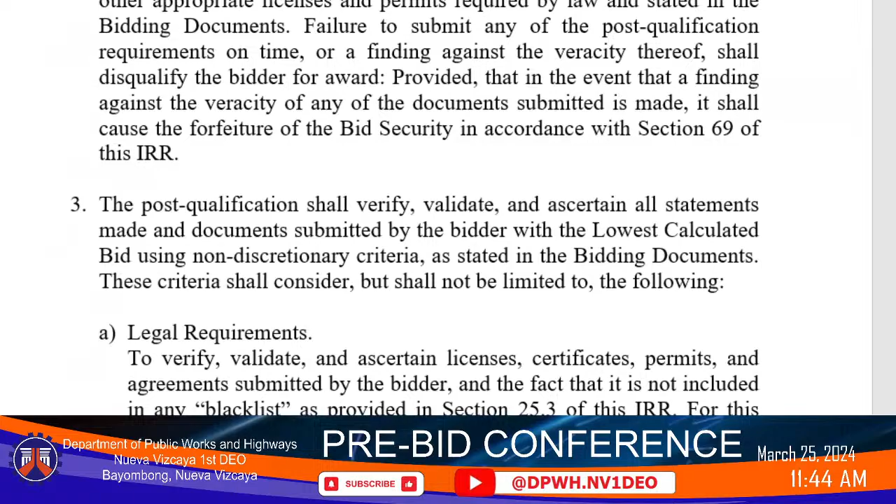The post-qualification shall verify, validate, and ascertain all statements made and documents submitted by the bidder with the lowest calculated bid using non-discretionary criteria as stated in the bidding documents. These criteria shall consider, but shall not be limited to, the following.

Legal requirements: to verify, validate, and ascertain licenses, certificates, permits, and agreements submitted by the bidder, and the fact that it is not included in any blacklist as provided in Section 25.3 of this IRR. For this purpose, the GPPB shall maintain a consolidated file of all blacklisted suppliers, contractors, and consultants.

Technical requirements: to determine compliance of the infrastructure projects offered with the requirements specified in the bidding documents, including, where applicable, verification and validation of the bidder's stated competence and experience, and the competence and experience of the bidder's key personnel to be assigned to the project for the procurement of infrastructure projects.

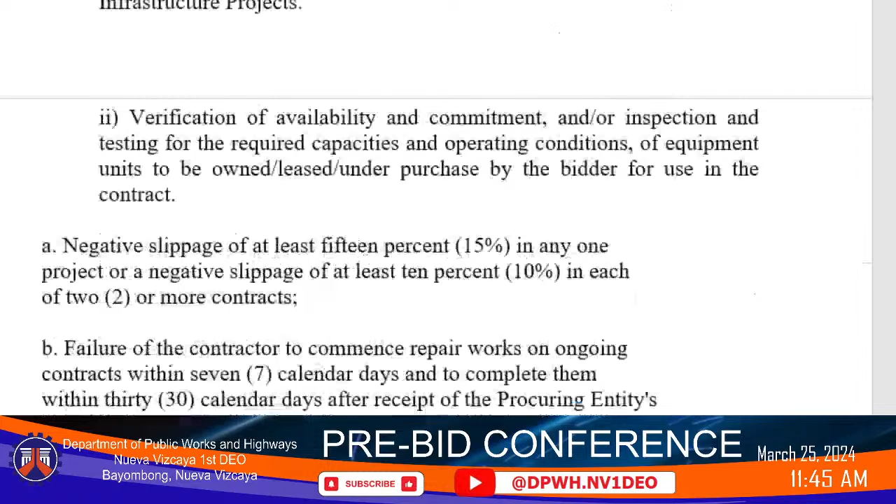Verification of availability and commitment and/or inspection and testing for the required capacities and operating conditions of equipment units to be owned, leased, under purchase by the bidder for use in the contract.

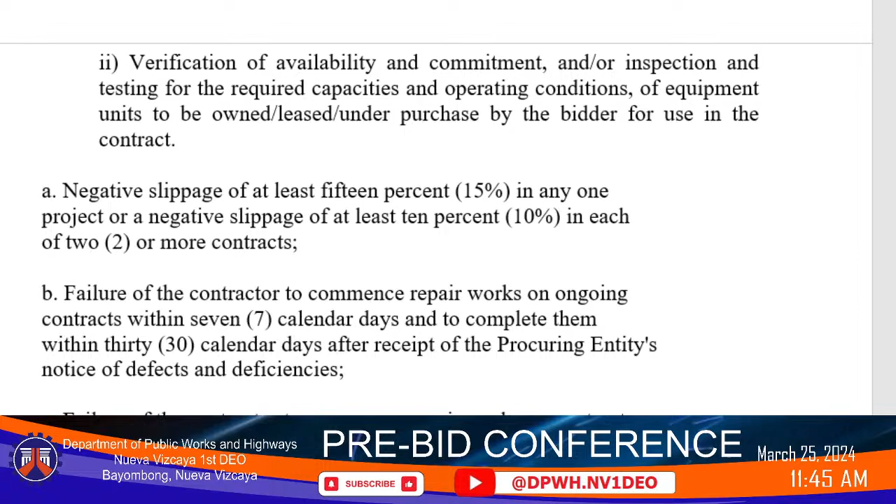Negative slippage of at least 15% in any one project, or a negative slippage of at least 10% in each of 2 or more contracts.

Failure of the contractor to commence repair works on ongoing contracts within 7 calendar days and to complete them within 30 calendar days after receipt of the procuring entity's notice of defects and deficiencies.

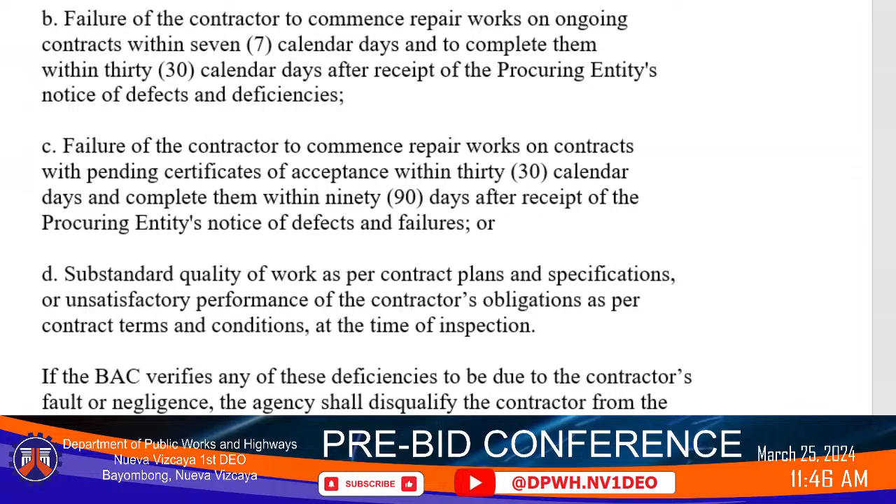Failure of the contractor to commence repair works on contracts with pending certificates of acceptance within 30 calendar days and complete them within 90 days after receipt of the procuring entity's notice of defects and failures, or substandard quality of work as per contract plans and specifications, or unsatisfactory performance of the contractor's obligations as per contract terms and conditions at the time of inspection.

If the BAC verifies any of these deficiencies to be due to the contractor's fault or negligence, the agency shall disqualify the contractor from the award for the procurement of infrastructure projects.

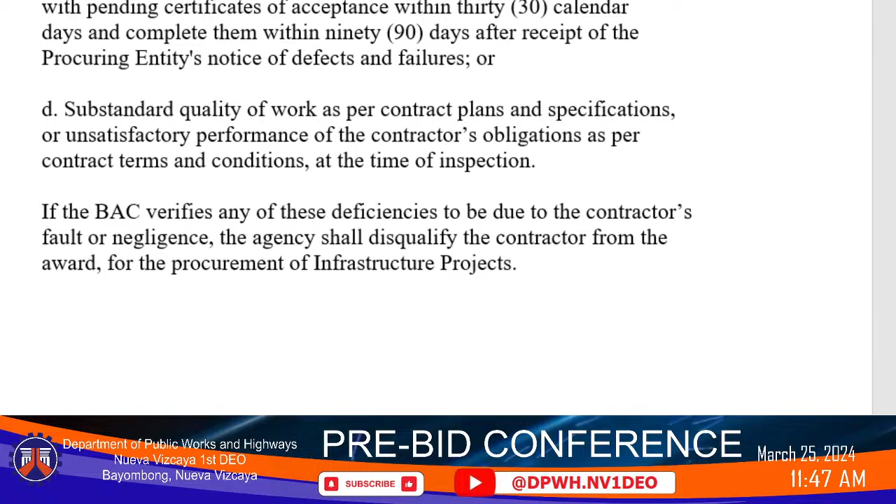That's all, sir. Thank you. Thank you, Secretariat, for the pre-recorded presentation of the fourth agenda. So let's continue questions, comments from bidders, and replies of BAC and other representatives of the procuring entity.

Again, may I ask the Secretariat if we have any questions or clarifications from our YouTube live viewers, especially our prospective bidders? Being none, so let's continue for the summary of proceedings, including bid bulletins, addenda to be issued - none.

So for the other matters, before our secretary will read the announcements and reminders, I would like first to read the supplemental bid bulletin 2024-2025, March 22, 2024, notice of postponement. Kindly, Secretariat, project the content.

Notice is hereby given to all concerned that the dropping and opening of bids for contract ID number 24BI0075, concreting of Magsaysay Hills, San Antonio North FMR, Barangay Magsaysay Hills, Bambang, Nueva Vizcaya, originally scheduled on March 26, 2024, is hereby postponed and rescheduled for April 11, 2024, due to revisions made in the approved program of works and plans. Please be guided accordingly.

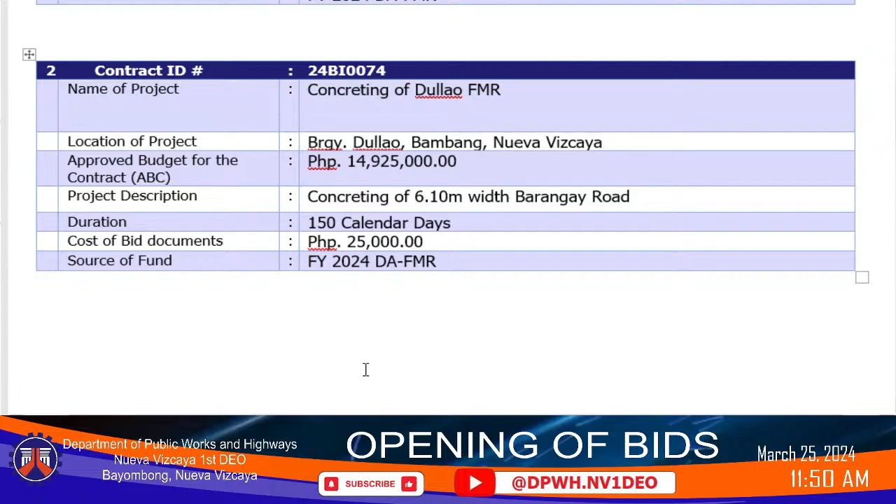For the 2 goods and services, first project, contract ID number 24GBI 33, name of the project, procurement of 1 set desktop computer, application use etc., for use of DPWH Bayombong DEO. Location of the project is DPWH Bayombong, Nueva Vizcaya, with ABC of 545,600 pesos and a project duration of 30 calendar days.

For the second goods and services, contract ID number 24GBI 34, name of the project, procurement of 1 set desktop computer, application use etc., for use of the procurement unit, ICT unit, Office of the DE, and Planning and Design Section, DPWH Bayombong DEO. Location is DPWH Bayombong, Nueva Vizcaya, with ABC of 907,115 pesos and a project duration of 30 calendar days. That's also the announcements and reminders for tomorrow, March 26, 2024, for the opening of bids.

Thank you. Again, thank you, Engineer Brian Neil Augusto, our Head Secretariat, for reading the next procurement activity, which is the opening of 2 civil works and 2 goods and services. Again, this is to remind fellow BAC members of our jury duty for the next procurement activity. So that's all for today - the pre-bid conference of 1 consultancy service, 2 goods and services, and 3 civil works.